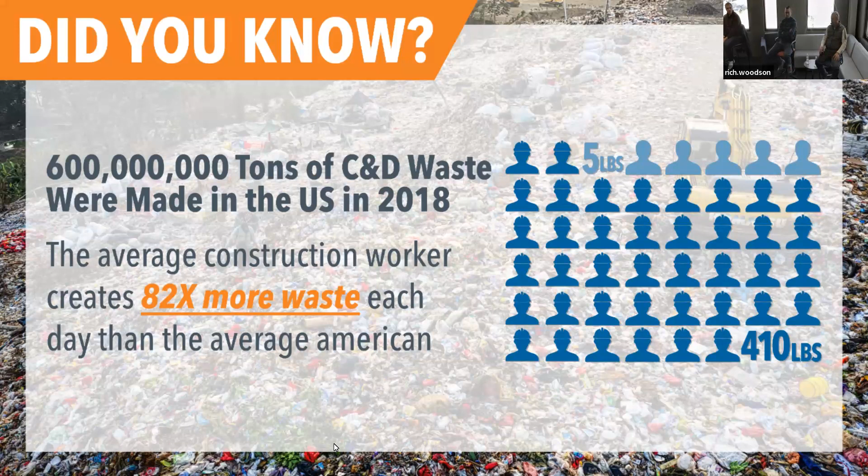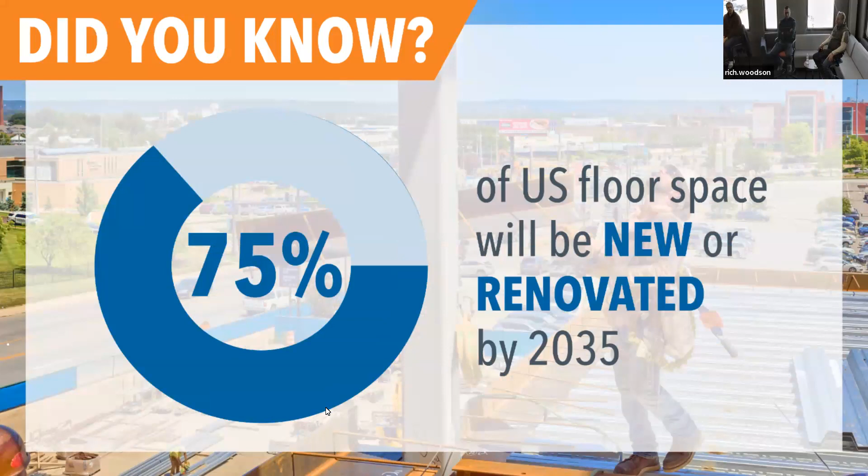So why does it matter? In 2018, there was 600 million tons of construction and demolition waste in the U.S. The average construction worker creates 82 times more waste each day than the average American. 40% of the Earth's raw materials are consumed by the construction industry, and we contribute 23% of global methane emissions. By 2035, 75% of the floor space in the US will be new or renovated.

This is a graph probably many of you have seen. Where we work today, the built environment generates nearly 50% of the annual global CO2 emissions.

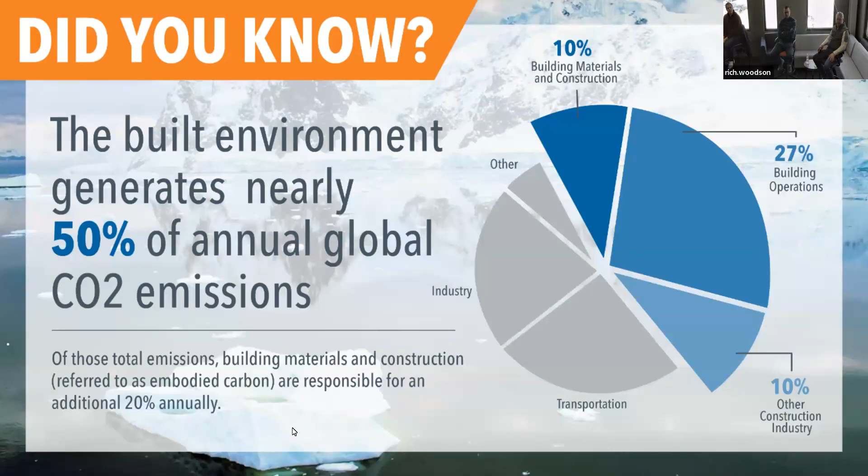Is there a way I can get rid of that top bar? Anybody know, do you have the mouse? Just need to open the chat. Oops, sorry, it's okay if we can't. They'll just click on the chat. Let's close that. Oh, okay, learn something. Tim, I assume you're monitoring the chat.

So we need to understand our impact and where we can make the most changes in our industry. Here's really the life cycle of the construction industry, and where do we have opportunities to make a change?

For MCL, we have an opportunity in the transportation to the site in some aspects, and then the construction of the building. In Ben's world, he can make changes to the demolition of a building, the way they haul the materials away, and then the decision to landfill or recycle those materials.

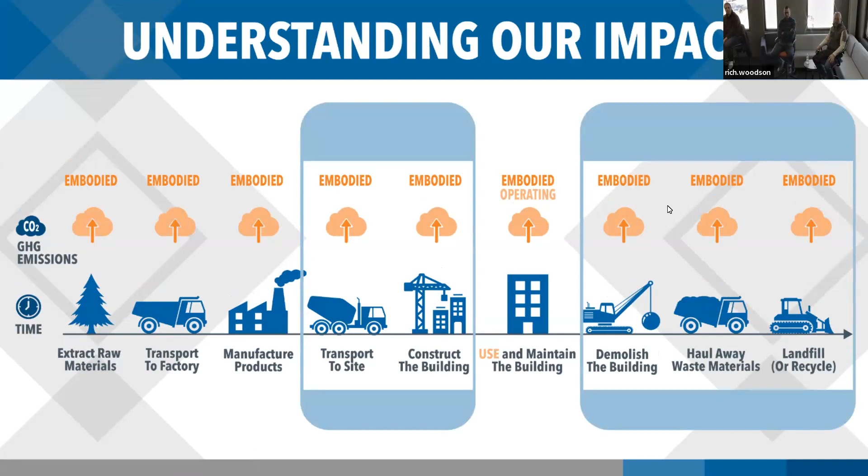So I'll turn it over to Ben now on what happens when our construction waste leaves the job site. Alright, so we're going to go over the whole life cycle of your building once you turn it over to us and we get rid of it. Traditionally, let's say 1990 and prior, if you wrecked a building, you pushed it in a hole, loaded it all in the truck and went out to the landfill.

Since the 90s, it started to progress into more and more recycling. When you think of a demolition contractor, I'm guessing you're not thinking the greenest guy in the world, right? People don't have that impression of us, but we are probably the best recyclers on a job site. We probably have the greatest impact on reusing and recycling materials of any trade out there. I'd argue that every day of the week.

Other contractors are sometimes talking in pounds of material they recycle. We're talking in thousands and thousands of tons of material. So we've really made a great evolution over the last 30, 35 years into being a very, very green industry.

Go next slide real quick. So we're going to go through the process. At Peitzmeier we kind of have two different types of demolition we focus on.

We call it white boxing, which would be, let's say in 20 years, MCL decides they're too big for this office and they're going to move out. Somebody purchases the space and wants to put condos in. We would come in, clear everything non-structural out, and give a clean slate to build back apartment buildings or something like that. The other one we do is full structural demo, where the building goes to the ground and you're left with a clean green field.

So either way, the first step's the same for us. We go into a structure and clear all non-structural elements out - ceiling grid, carpet, walls, all that stuff. We want to be left with nothing but concrete and steel, stuff that we can recycle.

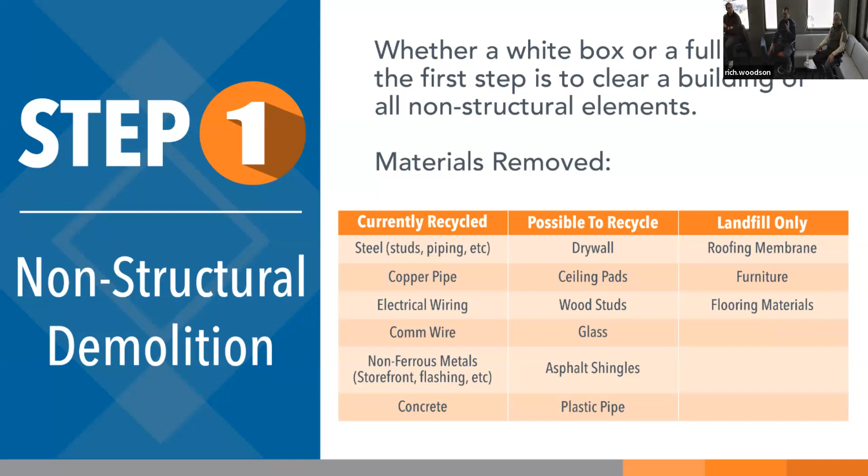All right, so step two, we've white boxed the structure. We're down to structural elements. Now what we're going to do is tear the structure down.

That's a great picture showing what these buildings typically look like before we wreck them. This was a cast-in-place concrete structure on Creighton's campus, Becker Hall. As you can see, all we have left is concrete. It looks like there's a little bit of debris on the outside, but that whole pile is concrete

and rebar. Things we're recycling on these are the walls, the columns, footings, floors, any masonry. So if you have partition walls that are CMU, or exterior cladding that may have been brick or masonry, that all can get recycled.

Structural steel, your I-beams, roof decking, cladding, any floor decking that was underneath the concrete, all stuff we can recycle. If you look at that picture, that's our high reach excavator, and it's got a processor on the end of it. It looks like a big scissors.

We can fit different jaws on there to process different types of materials. We have a steel shear for cutting iron apart. We have what's called a pulverizer - it'll take concrete and debond the rebar, so you can pull all your rebar out and you're left with nothing but concrete debris. Then we have a concrete shear for doing really big concrete members that'll just snap them right in two.

We have that on our big excavator, but we also have a fleet that fits all our different sizes. So when we're tearing a building down, we have our primary machine tearing it down, but we'll have 3 or 4 excavators chasing it, processing everything.

Tearing the building down is the easiest part of the whole job. The long duration times are processing the stuff up into usable products. So we might have that building down in 4 days, but we're going to sit there for 6 weeks processing and getting the stuff ready for market.

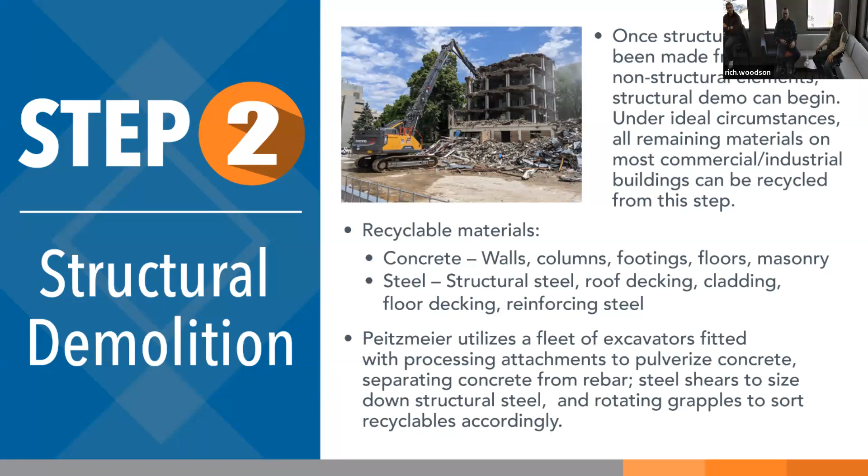Go to the next slide then. Okay, so step 3 is getting rid of all this stuff. There's a lot of different avenues we can go down.

If we look at metals first, we typically take our metals straight from the job site to the recycler. Alter's in town, they're probably the biggest name in town. They're actually in Council Bluffs. Steel gets loaded on site on trailers, hauled to their facility. They shred it and then they export it. A lot of it goes overseas right now, but some goes to the domestic steel mills.

You can see that's a pretty good picture of how we like to separate our jobs. You have a really nice pile of iron right in the middle. Insulation's been separated and put over to the side. And there's a concrete pile over to the right on this project.

Non-ferrous metals, we can go a little further with those. So if you're ripping this building apart, you're just going to lop everything apart and you're going to have pipe of various lengths with various conditions. We take all the material back to our yard.

We're cutting it down, so we're removing fittings. You're separating brass from your copper. Wire will strip, get all that off of there. So it's just a pure product that we can send to the recycler at that point. We found that makes it more economically viable to go through these buildings and capture that material if we process it further. Next slide then.

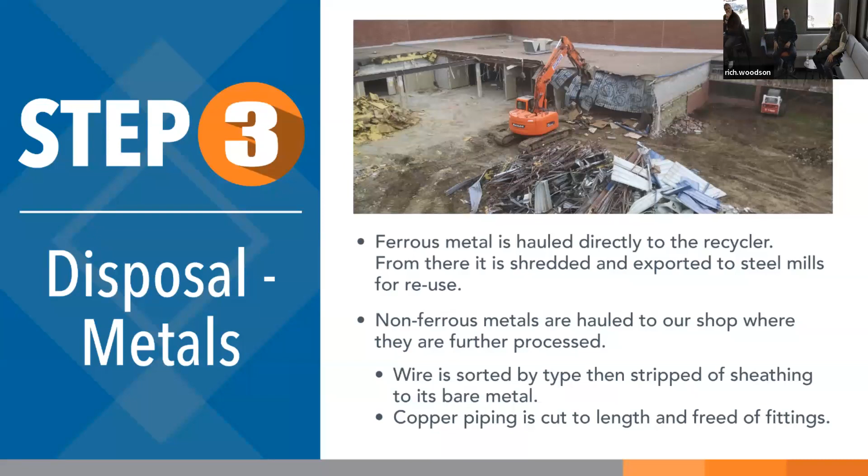Okay, so concrete and masonry rubble. This is kind of our big focus because it's relatively easy to do. There's a good end market for it, and we create a boatload of it.

So we just finished crushing for 2023 about 2 weeks ago, and we crushed somewhere between 50 and 55,000 tons of material off. That was all from our product or our products - no outside products were contributing to that. So we'll have some video later, you can see what that pile looks like, but that is a significant amount of material.

So we can process asphalt, brick, concrete, CMU, all that stuff. It'll come in, it may come in separated, hopefully - sometimes it comes in mixed together. We place it at our landfill. We have several different piles that we're utilizing: a clean pile, an oversized, a dirty pile, asphalt, brick. And then we're going to go through and process that further.

So if it comes in dirty, we need to run that material across the scalping screen, and we're going to recycle everything off of that. When we say scalping, we're going to remove all the dirt fines from that. That dirt gets reused on projects around town, so we put that on our fill pile. Now it's getting used as structural fill, and it's actually a really good product for that because it sometimes has some rock in it that helps it support a little better.

Concrete goes across the screen. It can go on the clean pile, or if it's still bulky structural concrete, we'll send it to a secondary processing pile where we use additional pulverizers, pull all the rebar out, and now we have another product we can sell as ferrous iron and concrete.

So we build these piles up all year. Come September, we bring in a customized crusher. They're just a subcontractor, they come in and crush our whole pile off. We can make different gradations.

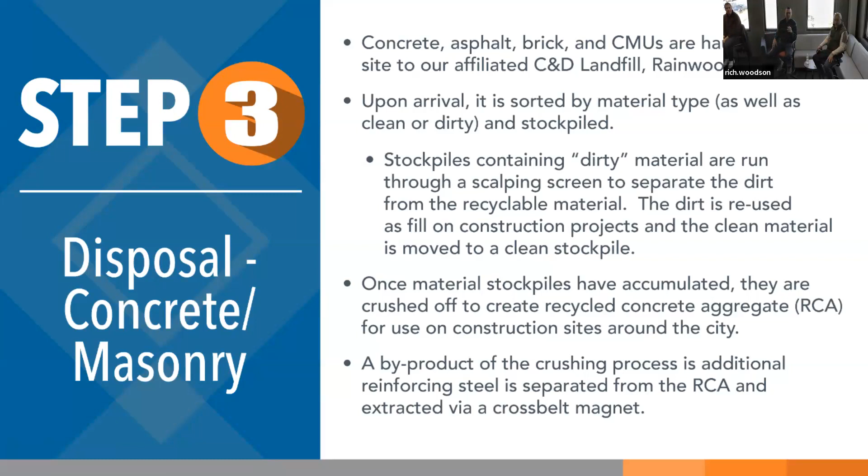Another thing we recycle is trees. For us personally, up until we purchased that landfill, if we had a land clearing job, we'd either burn it, which is not great for the environment, or we'd haul it to landfill, which takes up a ton of airspace. It's just not an efficient use.

Once we got the landfill, we started creating a stockpile like we did with the aggregate or the concrete. We build it up over the year, and we bring in a grinder once a year, grind all that material off, and it's a coarse mulch. It's not what you would see for landscaping. You can further process that, but we just don't do that.

A couple of uses for it though. Nurseries use it for their nursery stock. They'll put it along the trees to keep them damp.

One thing I'm very interested in, but we haven't worked out the details yet, would be biomass. You can take this stuff, and if you can find a user for it, somebody using a biomass boiler, and nobody real local to us does that yet, you can heat your facility for the whole year on the amount of mulch that we're creating. So kind of a cool use, hasn't quite developed yet.

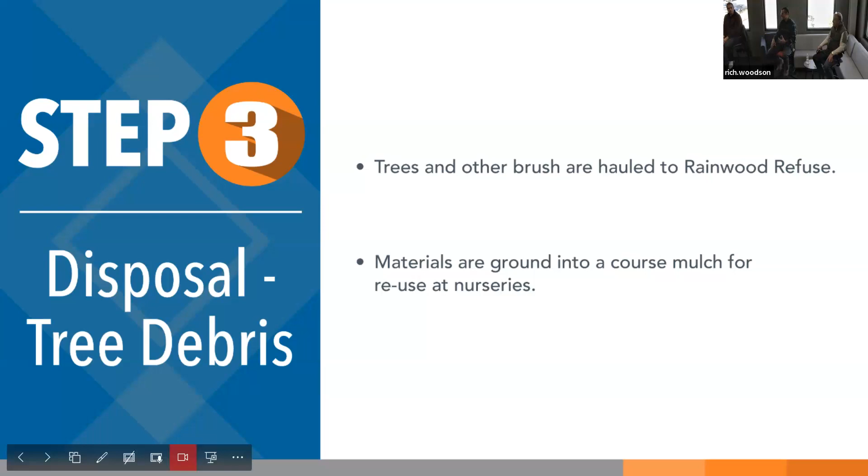So lastly, we've gone through all the stuff we can possibly recycle. Last step is stuff that we have to put in our C&D landfill cell. That's actually the smallest part of our operation. The smallest fraction of material goes into the landfill for us, which we strive to get a 75% diversion rate. That's pretty good, it's not the best in the world, but it's pretty good for the United States.

So material shows up at our landfill. We've decided this is mostly trash, this isn't stuff we can recycle. We dump the material at the landfill face, and then we go through one final sort, or we pick through it with an excavator and find any last recyclables we can pick out of that, or anything that doesn't conform to our waste stream. A C&D landfill is different than your typical MSW landfill like Pheasant Point, so there's certain materials we have to be careful to pick out—paints, tires, stuff like that. That has to go out to Pheasant Point.

So we do one final separate, and then push it in the landfill cell and cover it. Just some real rough math—we said we did 50 to 55,000 tons of aggregate last year, and we only did about 2,500 tons of trash last year. So I think we do a pretty good job of separating that stuff.

And you'll see that industry-wide demolition because it just makes good economic sense for a lot of stuff.

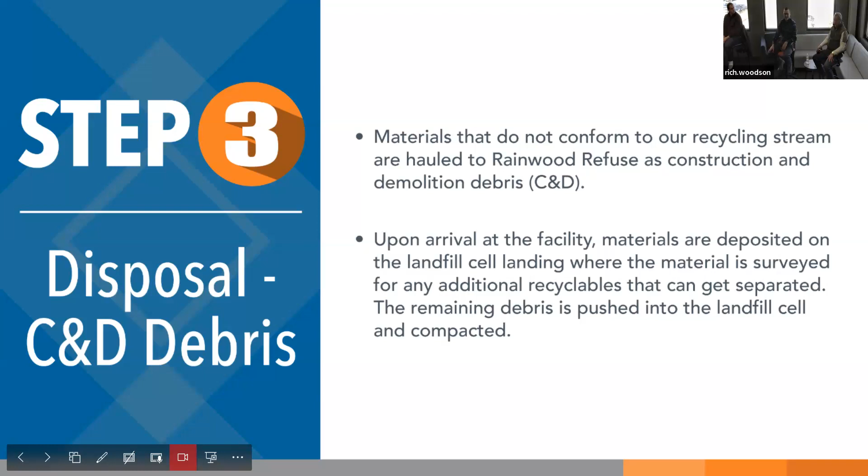Next slide. So how can we be better? The main driving factor is end users. There's a lot of product we have no end user for, so there's not much we can do. Drywall and ceiling tiles would be a fairly easy one to recycle. You can field apply it, but you have to find a farmer willing to do that, or grind it up for use as soil modification. That's a fairly easy one.

Asphalt shingles, another one that'd be fairly easy, but there's just not the need there yet. You can repurpose that into asphalt pavement in some scenarios. They don't locally, and one of the problems is land isn't hard to come by around here, so landfilling is pretty easy and economical. On the East Coast and West Coast, land's at a premium. We're seeing $22 a ton for disposal at public landfills here, but out there they're paying $80 to $120 a ton for disposal, so they have a lot bigger driving factor for doing the recycling.

The next step, if we can find these end users, is you can install what they call a sort line at your facility — it can be very rudimentary or very complex. The rudimentary version is a conveyor belt going along very slowly with a labor force of 5 guys visually picking different materials out and separating them by type: glass, wood, concrete. You're left with nothing but stuff that can only be landfilled at the end of your conveyor belt.

Now, the company I'm referencing, Eberhard in Switzerland, they're the pinnacle of this stuff. They've been doing it pretty hardcore since the 80s, and they have I believe an 87% diversion rate, which is outstanding. They have a fully digital pick line — there's one human involved in the whole process, and he loads the material into it. All their waste comes to this facility, and then they have robotic optical sorters that separate everything. It's amazing to watch this thing work.

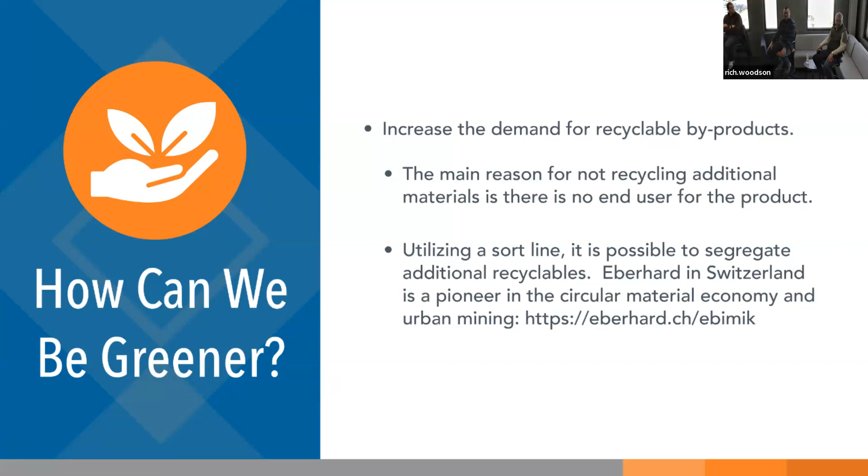That's not here. So how does this reduce our carbon footprint? If you know anything about the mining process, we have a lot of mines locally — the Fort Calhoun Quarry, Weeping Water, sand pits out in Waterloo. They are extremely carbon heavy operations. The haul trucks, the crushing operations, the amount of electricity they're consuming to do this stuff is extremely carbon heavy.

By supplementing these aggregates with recycled concrete aggregate, we can really, really reduce that down. The amount of carbon we're emitting to create this new aggregate is very minimal. We're talking one crusher spread and a loader to fill it, versus Calhoun running 12 haul trucks 24 hours a day, 7 days a week. That's just the haul trucks — that's not the loading, all the other stuff they have associated with it.

And then the other one is with the steel. Ore mining is just as significant a carbon contributor, if not greater, as mining aggregates, and a lot of it has to do with international shipping too. We don't get all our material domestically — a lot of it comes from overseas, so you have the shipping associated with that contributing to it. So any of the recycling we can do, even if it's just concrete and steel, is going to have a huge impact on the carbon footprint of the construction industry.

So I know I talk extremely fast. You told me you were gonna talk slow. Sometimes I get ahead of myself.

I'll give a question section later, but does anybody have any questions on that stuff right now? You say we're not recycling concrete? No, well, some people don't.

Locally, there's a lot of contractors who do this. Most of the demolition guys do, some of the grading guys do. But by the same token, if you go north, west, south, where it gets more rural, they don't have the facilities to do this stuff. So they're finding a farmer with a hole in his field, and it's legal to do. Dump it in there and push dirt across, and now he's got a flat field. But not necessarily the best thing to be doing, I don't think so.

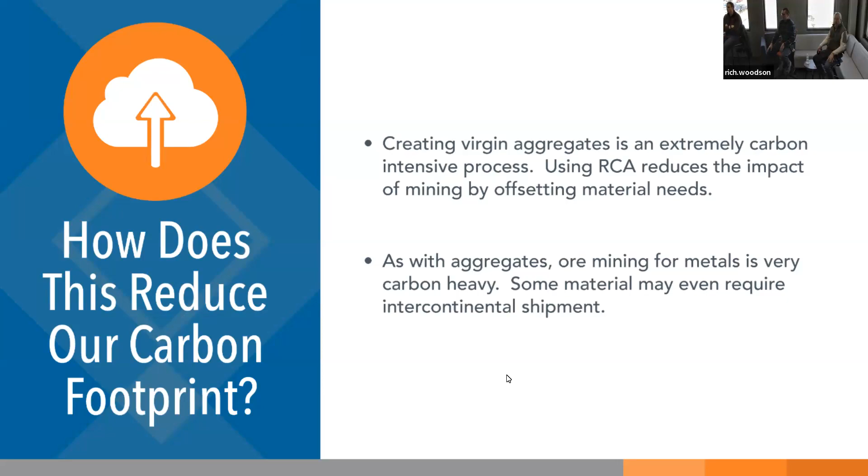Sounds like it would be easier to actually specify recycled concrete aggregate in the mix design. Now with putting recycled concrete in the mix, there are some issues, a lot of it has to do with the porosity of the material. There's stuff over my head on why, but it's about how it performs in that mix design that's causing problems.

I think they're doing research in Kearney on that — I've heard some people are looking at it. We did have a concrete summit earlier this year, in August I believe, so this is something being pursued locally.

I'm not going to name names, but there are universities partnering with local concrete industry people to make that happen. Like you said, one of the issues they're highlighting is the unpredictability of what they're getting as far as this recycled aggregate goes — so finding a way to make it consistent, whatever grade you'd call it. But there are some promising results from it.

We got this video here — before we start, this is a video of our crusher spread in operation, because it shows some other parts of the landfill we're working on. I may hop up and point some stuff out while we're running.

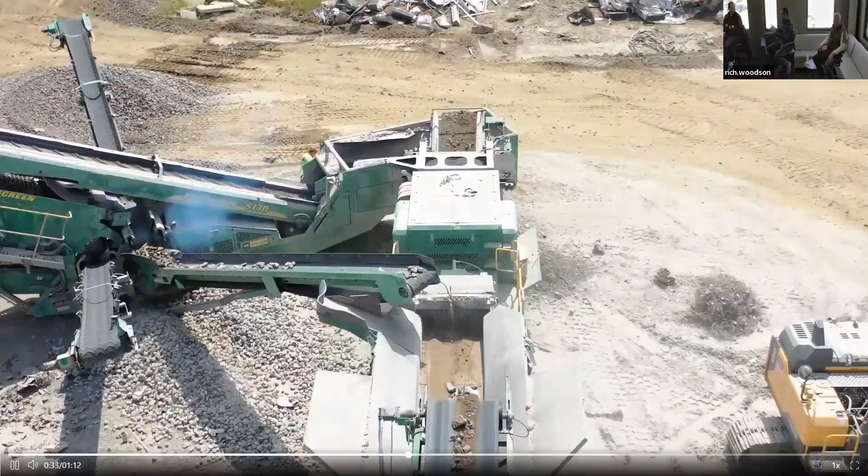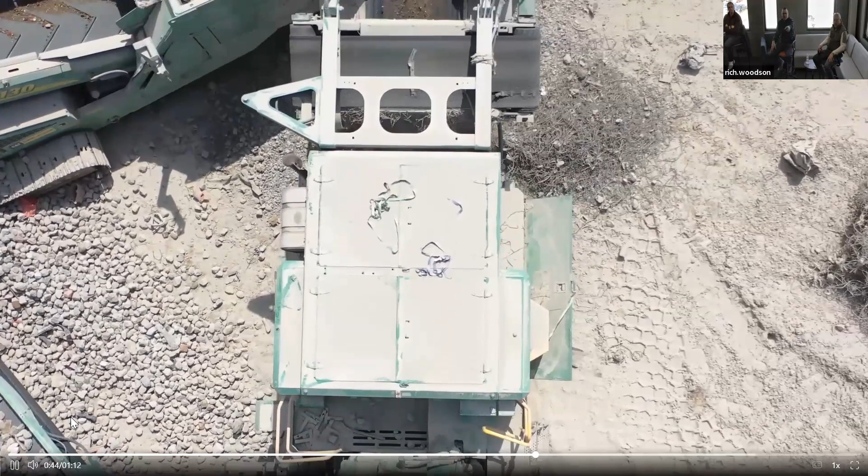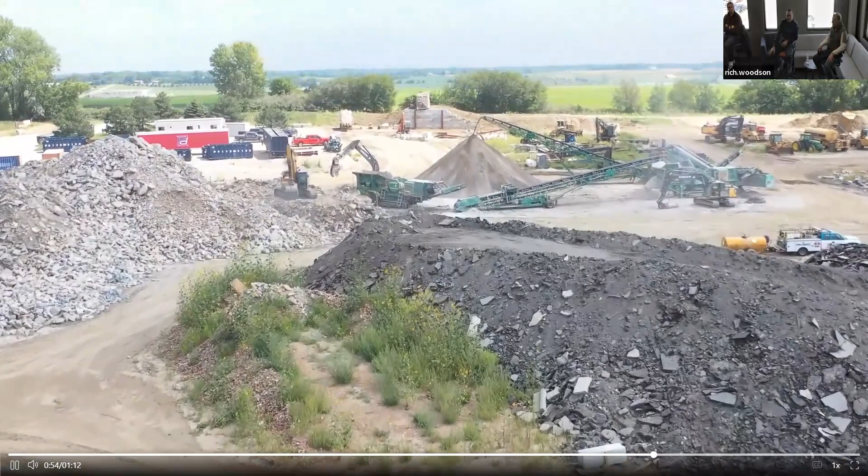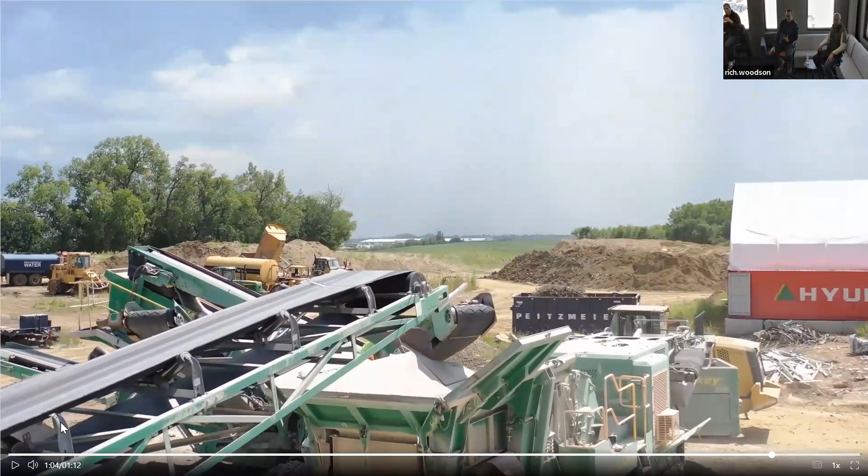We don't need it for RAP. We actually found that people love buying asphalt because it makes a great parking lot base for a temporary parking lot — when the sun gets hot and you hit it with a roller, it basically turns into asphalt again. I love that stuff. But Omni, our big asphalt contractor in town, will reincorporate that into their mix design. I can't remember the exact spec, but there's a certain percent of RAP you can put back into a new mix.

So I'll pause — you can point out a couple other things going on here.

So right here is our non-ferrous processing shed — all our wire and everything goes in there, and we've got 3 guys whose full-time job is processing non-ferrous metals and making them resalable. Back here, you can't see it great, but that's a mulch pile — we did 22,000 yards of mulch this year, and all that stuff is being hauled off to various end users. And then you see the dirt.

Not that you recycle dirt, but we actually do reuse dirt. So when you have a big export job, it comes to our landfill, we store it - we're like a big bank for dirt. And then when there's a fill job, it goes out from there and we can use it as fill. So you never really waste it.

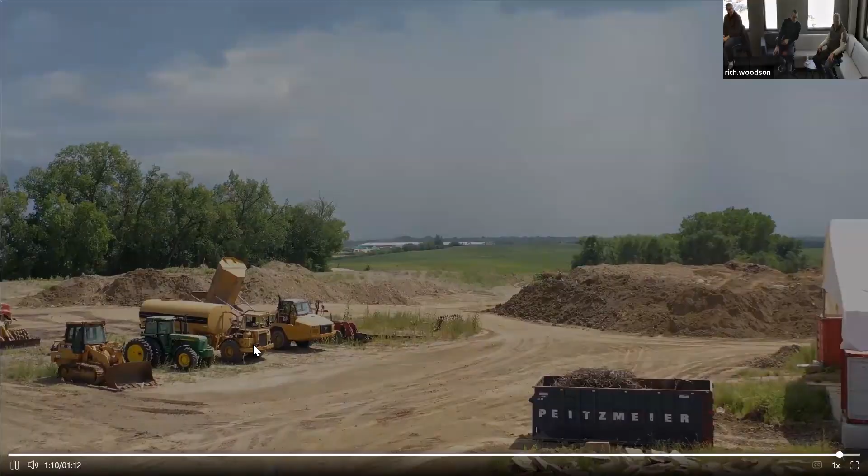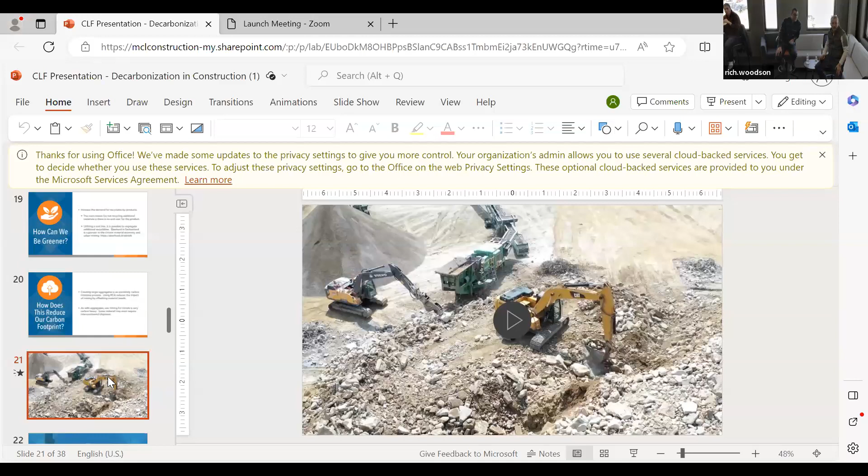That's a permitting issue. The way we're permitted with the NDEE right now is we're not allowed to take any outside vendors. As long as we're the hauler, we can do it, so you could contract me to haul your debris for you. But Conrico's open to the public for their concrete - I couldn't say I'm open to the public for trash. That's pretty standard of C&D landfills in Nebraska. The MSWs will take everybody, but Abe's Trash, if you're familiar with that - they're in our C&D landfill up in Washington County - same deal, they're private, they can only take their own containers.

Another question of mine: how can engineers best facilitate recycling on our projects without forcing your hand to add cost to the project? Talk - I'd like to start seeing it in our specifications. Talk to your demolition contractors about ideas you have. I trust - I don't know about my competition, but I would love to talk to people about what we can do to make these things more efficient.

Another great one would be: okay, allow crushing on your site. If you have a huge concrete building you're tearing down, let's crush that stuff on site and reuse it on site as aggregate somewhere. Now we're saving - think of all the trucking we're saving. We said we had 55,000 tons of material in our landfill, all that had to get trucked there. A side dump carries about 20 tons - think about how many truckloads of material that's coming out there. We run, I'd guess on average 30 truckloads of material in there a day, and that might be on the low side. So if we keep some of that stuff on site and reuse it, it's gonna benefit the project because you're saving on trucking, you're getting your material way cheaper for your temporary roads, or if you get it incorporated permanently. In my mind, that's always a no-brainer.

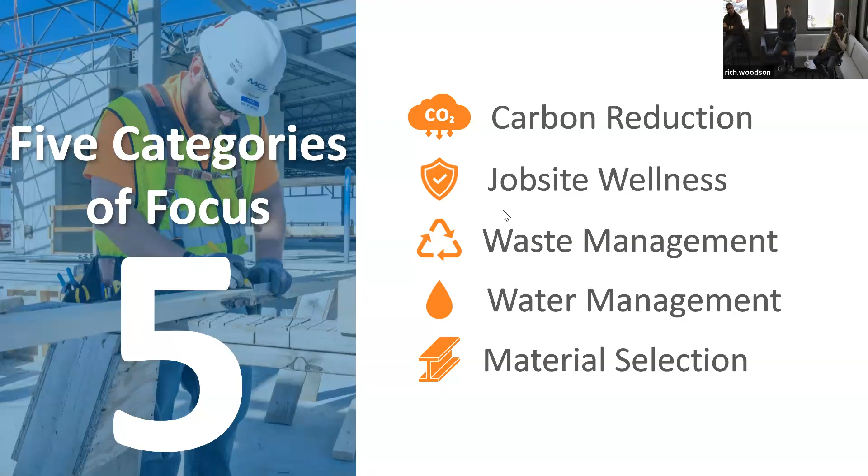I'm going to go a little deeper into 3 of these areas, which I think have the biggest impact to carbon reduction. But first, let's talk about sustainable construction leaders—those who have signed on to the commitment.

This is back when it was still about 20; I think it's up to about 25 now. You can see there are several of our top 20 firms in here. The big boys are looking at this, and MCL wanted to get ahead of the game. We're amongst a lot of individuals—we actually meet several times a year and talk about best practices, what's working well. My goal at the end of the day is...

...to put competition aside and try to get other local contractors to sign on to the commitment. I'll probably be more successful in that by convincing owners to put requirements in their specs that require waste diversion. We're seeing it already, and that's where we're headed.

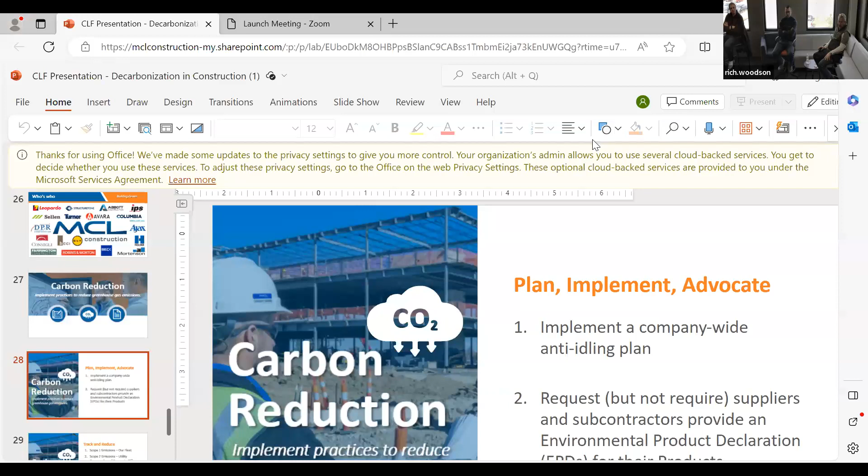But let's talk about carbon reduction—how do we reduce our greenhouse emissions? Number one, we've implemented a company-wide anti-idling policy. We're going to—what did just happen? We did that.

We're also going to try to get our subcontractor partners to play along with us. What we are not going to do is police this. We've got a policy, but I don't want our project teams—our superintendents, our project managers on site—to feel like being sustainable, forcing them to be sustainable, makes their job harder. So we're doing this, and I'm getting good buy-in on a lot of it. We'll find out when it's really, really cold or really, really hot.

Also, this isn't my language—it's the contractor's commitment language—but we want to request, not require, our suppliers and subcontractors to provide EPDs. I think everyone in the room knows what EPDs are. I think the reason they use this loose language right now is that many products still don't have EPDs. As we continue forward and manufacturers provide these, we as a project team and contractor team can use that to make better material selections.

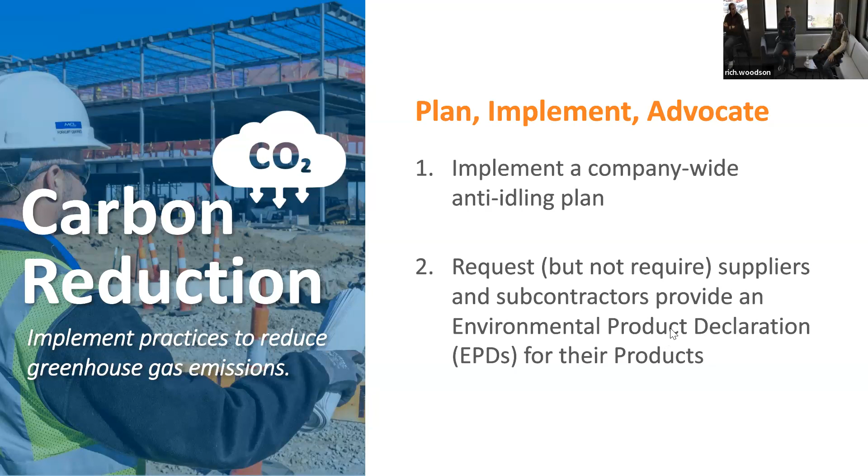The other thing we're required to do is track and try to reduce our scope 1 emissions, which is our fleet. We're paying attention to our fleet and those vehicles which are no longer producing good fuel efficiency, and we're replacing them over time. We are looking at electrifying at least one truck in 2024. We're still debating how an electric truck works well when a guy's at a job site. We haven't ruled it out, but we're investigating it.

We're looking at our scope 2 emissions, that's our utility consumption. I'm working hard right now to become Energy Star certified here. Unfortunately, this building is about 3 plus years old, and they ran it for 2.5 years with the rooftop units running 24/7. So they dug me into a hole with energy consumption, and I'm working our way back out of the hole. I've implemented occupancy schedules, and we're getting there. It's just going to take a while to dig out of the hole they left me.

To be honest, on scope 3 corporate travel, we don't do a lot of corporate travel, and I'm not there yet on tracking that. We need to report and disclose internally. My goal, and our leadership here, are not afraid to report externally, so when we see good things, we'll report it.

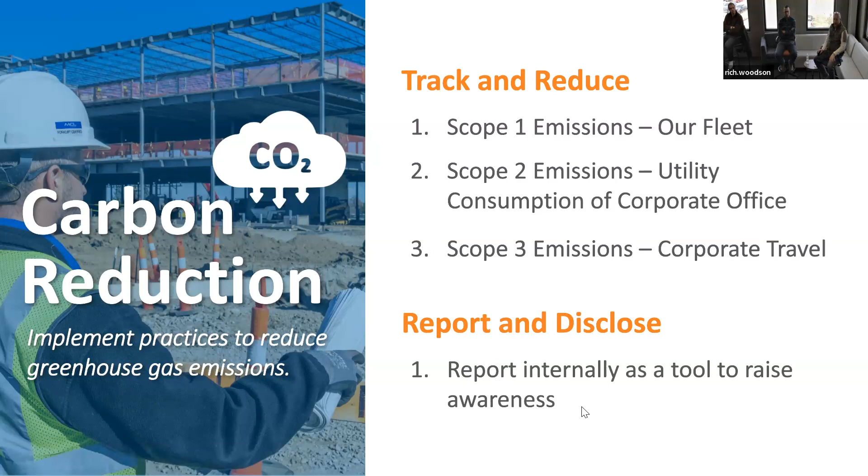Waste management is probably the area where we can make the biggest impact on the environment. And number one is picking a good, enthusiastic demo partner. I told you guys, I warned you.

So number one, we want to set waste diversion goals. UNMC and Nebraska Medicine are requiring waste diversion goals, and some other school districts are approaching it. I think when you start, our goal is to educate them to include those in their requirements. Our leadership has found so much interest in this, and understands that it makes such a big difference, and it's not that hard to do.

We're finding out that I've now been told we're going to do waste diversion on every single project where we have the real estate to do it. It's not really about the cost, it doesn't cost that much, and we're tracking that. If I put a 30 yard dumpster out there and fill it, I've got to dump it more times, right? If I put 4 20 yards out there, we're not really seeing an increase in our hauls.

So we need, at least per the contractor's commitment, to create at least 2 waste streams to divert from the landfill. It's not hard to get to 4.

Some of the more difficult things is to work with your haulers and your demo contractors to get the weight. Everything that leaves our site, I need a weight on it. The hardest thing to get that on is our concrete suppliers. They do their washouts and have all this excess. I need to know how much that weighed, even if we're estimating a dump load truck. He talked about removing trees - I need to know the weight of those trees too so we can take advantage of that as part of our diversion rate. Some of the hardest things to do is just get people to sort it correctly.

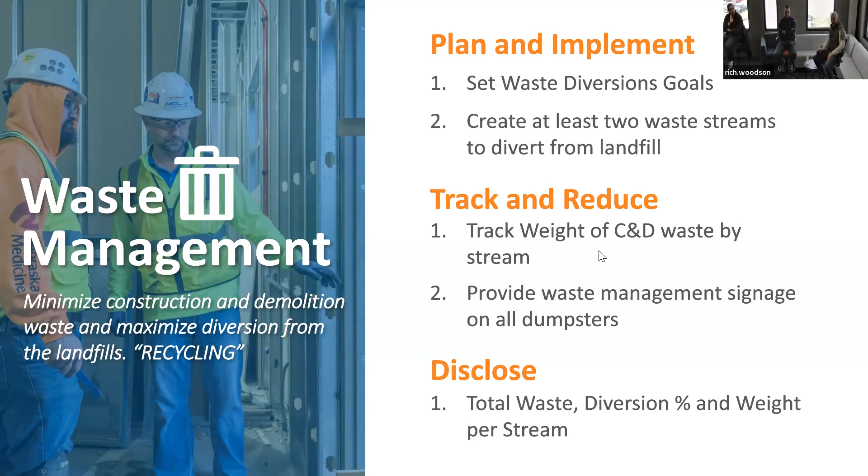Here are some of the available divertible waste streams: concrete, which we talked about, drywall, wood, cardboard, and metal. Every project team we have is really good at capturing metal because they reap the rewards. Soon, don't tell anyone, I'm going to take that away from them, and we're going to spread it across our whole company, because some people get on projects that don't have a lot of metal, while others get on projects with a lot of metal and they're getting all these rewards.

There's actually money in cardboard, not right now, but there's a lot of money in cardboard when it's paying - I think it was as much as $140 a ton. We now have accounts with the 2 major cardboard recyclers in town. I've been told by our haulers, like Abe's, to let them pick where we haul it, because depending on where we are compared to those recyclers and how they want it - First Star Fiber wants it clean, and International Paper doesn't care - it's open dumpster versus closed dumpster.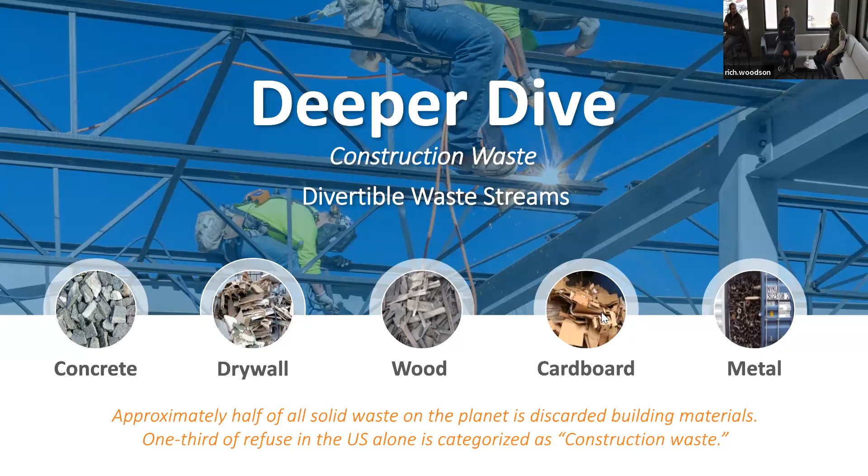At the end of the day, there's money in cardboard, so I can incentivize our entire team by sorting it correctly. Prior to doing some of these projects where we started figuring out how to do this efficiently, I wouldn't have thought there was that much cardboard on a site - I was an engineer in an office building doing projects. Once you get on a job site more often, and once I show you some stats from a tenant fit out, it's incredible how much there is.

So we want to disclose this - but how do we disclose it? We want to get our owners excited, so I need something that's flashy. This is a tenant fit out, Fusion Medical up at 192nd and Dodge. We really picked that project because we didn't know how well waste diversion would work on a tenant fit out.

This is where our superintendent was so excited - he got all of our subcontractors excited too. They were really good at sorting and not contaminating. We had a 65% diversion rate goal, and we hit 68%. I'm going to zoom into some of this.

What the contractor's commitment says is you have to hit at least 65% of waste diverted, or you need to hit a total waste on a project of less than 10 pounds per square foot - and we were at 3.3 pounds per square foot.

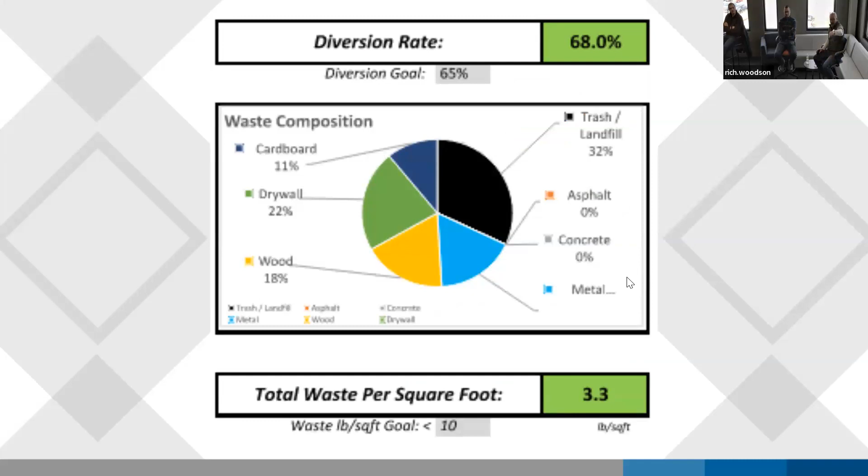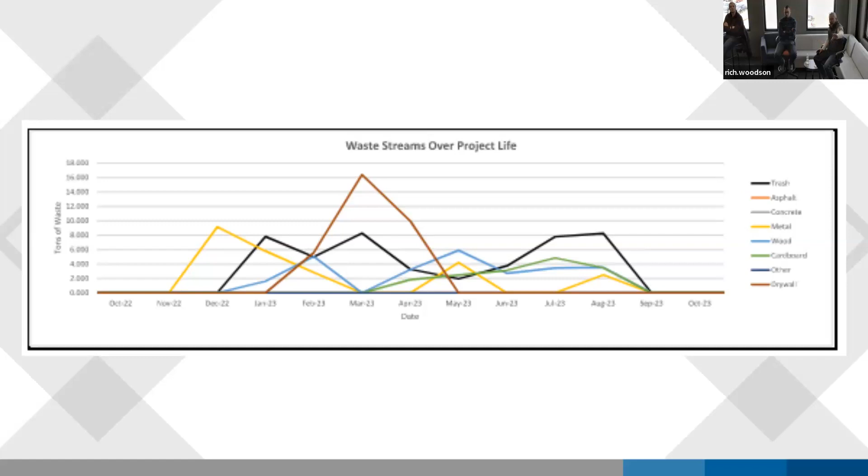So what we've done on this graph is the pie chart showing the waste composition - I'm sorry it's fuzzy, but you can see where the waste was on our project, and here you can see the waste streams over the project life. What we're analyzing is when we really need the appropriate amount of dumpsters there, so we can estimate it appropriately in pre-construction.

Where'd the 10 pound number come from? That's the contractor's commitment. But if you look here, we had over 15 tons of cardboard on a tenant fit out - it's a 100,000 square foot tenant fit out, but it just floored me.

And as we continue to do this, at our company quarterly meeting last quarter, I wanted to make it relatable - so the amount of waste we diverted from the landfill is equivalent to 16 African elephants or 2 737 airplanes. Are African elephants the biggest elephants? They are, okay, that's what I was thinking.

Now what we're going to do is make this relatable to our owners - so if I'm doing a project for an R&L trucking company, I'm going to relate this to semis, right? We want the owners to get excited about this, because if we can get people excited, this is where we can make the biggest impact.

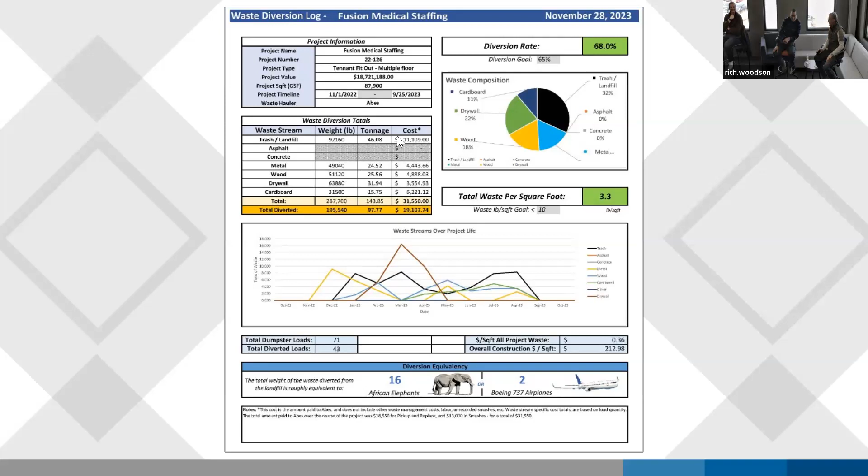Material selection is an area where we have very little influence, but if we're a CMR working with project teams early, that's when we can try to educate. Everyone in this room is really educated about healthy building materials, and then we just need to make decisions on the cost of those materials and whether we can afford them. That's why working together as a CMR - you're saying this, we're trying to influence you, we price it up.

We tried to do a project we're building in partnership with UNK and Nebraska Medicine out in Kearney. We tried to go mass timber and we couldn't make it pencil out - it was just too expensive. But at least we're talking about it, right? And that's where we need to start.

If there are more people like you on the design teams who understand this, and if we can start getting good EPDs where we as a contractor can make good informed decisions on what the right product is for the project while still meeting the design intent, that's where we're headed as a contractor.

Before we get to questions, one of the things I'm working on now - and I'm really in its infancy, I've been working on it for about 2 days - is on an upcoming project, I'm going to try to make our construction trailer net zero.

Video's over, we can all say swear words now. Is it actually?